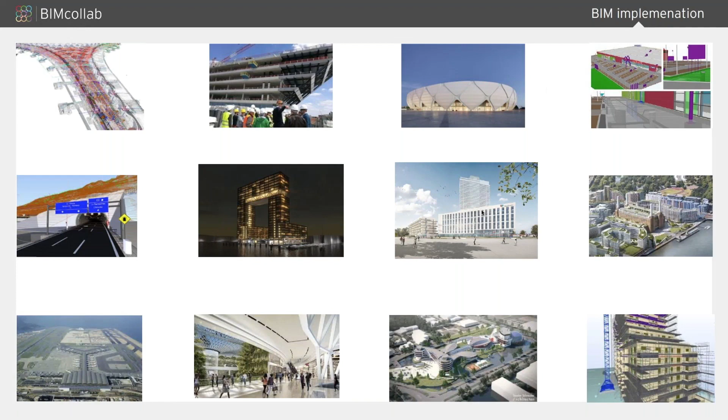If you look at the challenges that projects today have, it's also related to BIM implementation. So a lot of projects are now depending on tools that assist them in every one of those steps, design, engineering, and construction. And we see a growing use of these new tools.

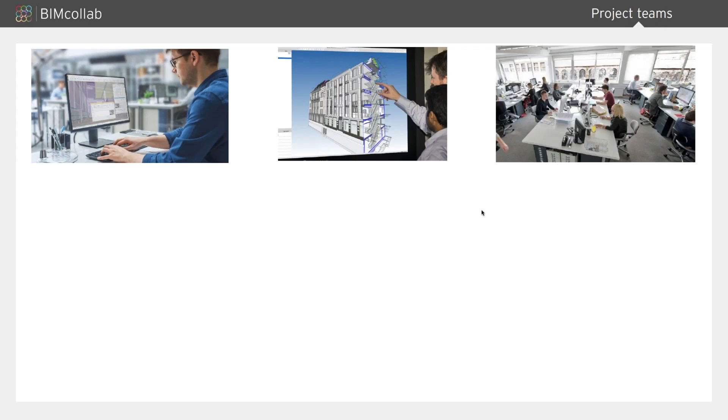As complex as projects can be, there are different teams, each with their different discipline, experience, responsibilities, and expertise, using whatever software they feel fit for their specific tasks. It might not be the same for everyone, but the teams have different points of view. They can even be using VR to get a good understanding of projects and problems. They might look at dashboards or quantities for the project to be able to get it across the finish line.

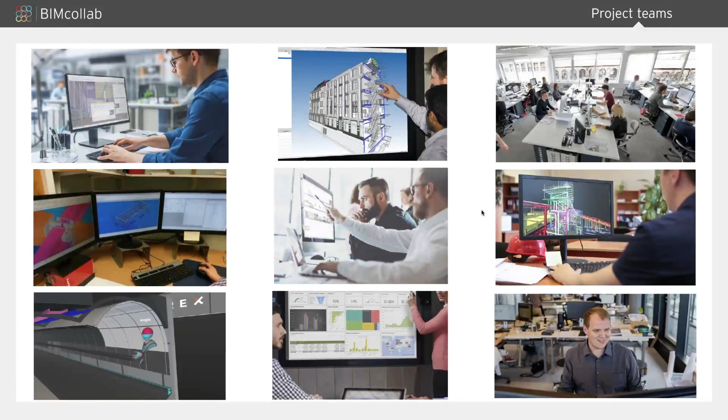If you look at how communication is documented, we feel that the efficiency of teams is highly dependent on a streamlined workflow. If you look at the traditional methods, review meetings can be done, or Excel could be used to document specific issues from those meetings, getting their comments back.

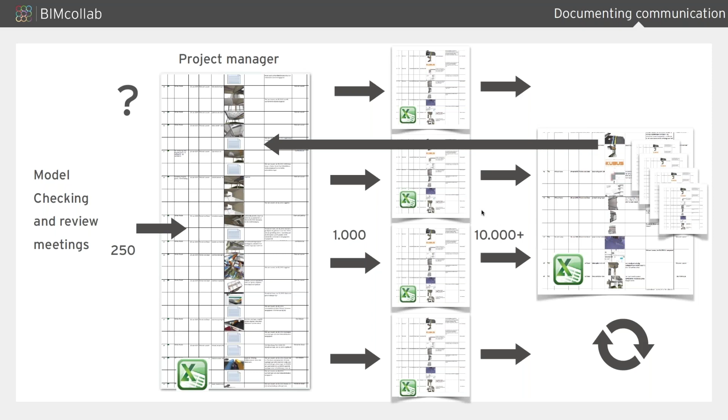And as you can see on the screen, this might evolve very quickly. So communication about status, responsibility, some approval of solutions, and this usually is up to the project team to put into one coherent document. And it's not a one-time thing, it's recurring during the life cycle of the project. And of course, there's always a sort of inherent risk if everything is put together correctly.

If you look further, we see that there are different tools in use. If you look at the BIM modeling tools, they create the models, work in progress. They can be combined with other tools like BIM checking tools. And it will also be wise to have a sort of structured communication and coordination platform attached to that. So how well they interact with each other is also part of the success of projects.

So how does BIMcollab help here? First of all, we have our cloud repository where issues and communication can be channeled through. So it's accessible for all team members on projects to log in from a web browser and view all the current topics. We have a connection for integration with different types of tools in this process.

So you can interact with the issues directly in applications. And we also have a companion desktop validation tool, BIMcollab Zoom, which can check models and also report results back to the BIMcollab cloud. And on top of that, we have common data environment integrations so that your models that are stored on those platforms can also be viewed online on the BIMcollab platform for context and also creating and responding to issues.

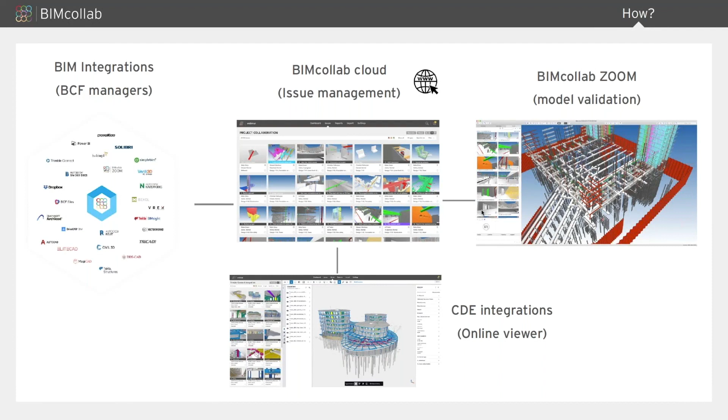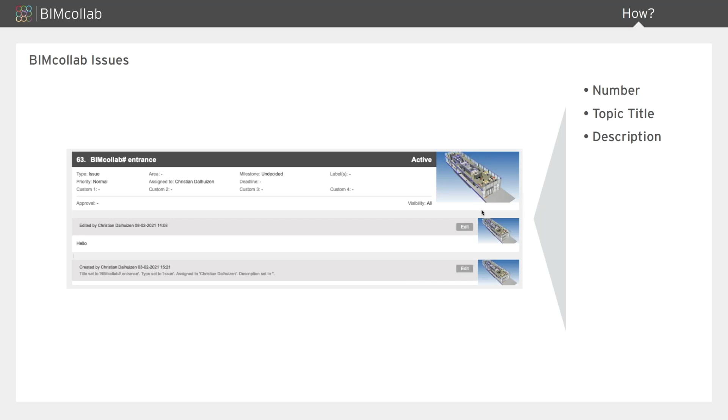So what is an issue for BIMcollab? If you look at this picture, an issue can have a number, it can have a topic title, it can have descriptions, and also very importantly, it can be assigned to a team member for responsibility at that given time in the process. On top of that, we have BIM viewpoints, which actually locate issues and even show the components that are linked to those conflicts or issues.

On top of that, we have other attributes like priorities, milestones, types, labels, comments, and even areas and custom fields if you need those in your processes. So what does this empower? Issues can be created in different types of software.

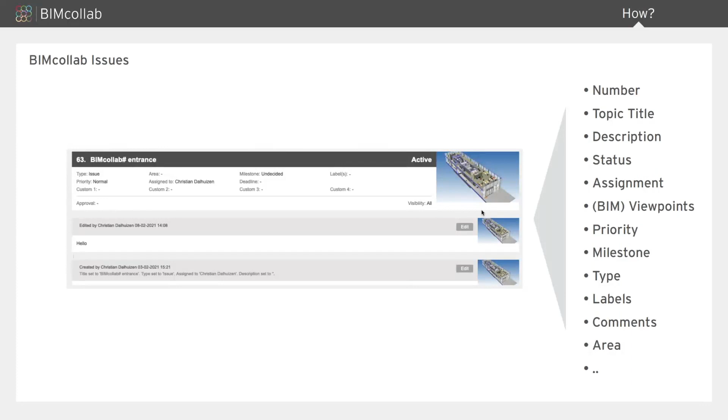So maybe for checking, you can use any of the tools that we connect with, and they all will have the same viewpoint of that specific topic. If we move further, you can also transfer those issues through our cloud system to any of the connected modeling tools, and they all look and see the same exact viewpoint. This creates, of course, better understanding and context for anything that has been communicated.

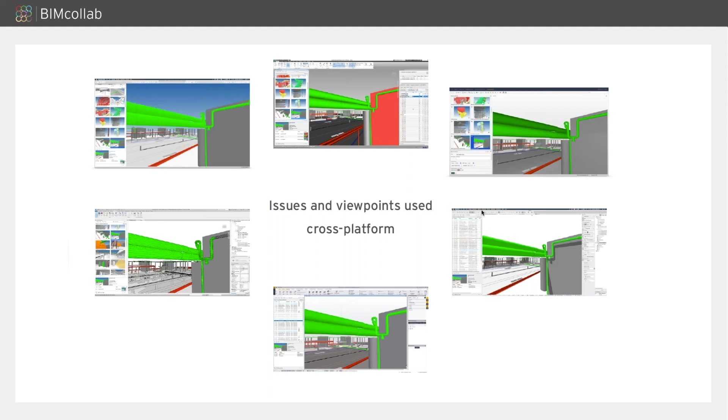I also want to discuss the availability of BIMcollab for many different scenarios. As I mentioned earlier, we have a lot of plugins or integrations with different tools within projects. So the most commonly used are already on our platform with a direct link. And we already have more than 25 connections at this time and continuously increasing this number. All of these plugins can directly be downloaded for free from our website for your specific application and version.

So I talked about different scenarios. This integration allows us to apply to many different scenarios, like maybe a Navisworks Revit setup, or a Revit to Revit communication, or even further, Solibri Revit, Solibri ArchiCAD, ArchiCAD Revit. In this example, you see that there's a lot of interaction possible with BIMcollab, and it even opens the door to incorporate several different applications that you might not even be using at this point.

So the chances are high that any of these scenarios will apply to projects that you are running yourself. If you are not yet integrated, it's also very good to know that we build our system on open standards from the Building Smart Alliance. This is the BIM collaboration format as a basis. So if your software supports this open standard, you can also export and import directly from our cloud platform and interact that way, be it in a somewhat stepped approach. But of course, you can still contribute very nicely.

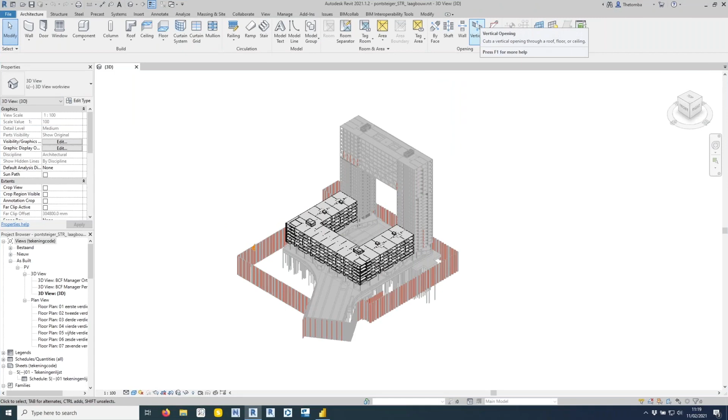After that, you can simply add and receive the issues, edit them and create issues, and also communicate with the rest of the team. So for this, I will quickly jump to my Revit modeling application, where I have already installed the BCF plugin, which you will find in the menu.

From here, I can activate the manager, giving you this dialog with the connect option available. I will log in with the credentials of the structural engineer and connect to the site. If I have more projects, this will be in this drop-down list, but the project that I will be working on is now selected. From here, I can see that I don't have any issues yet.

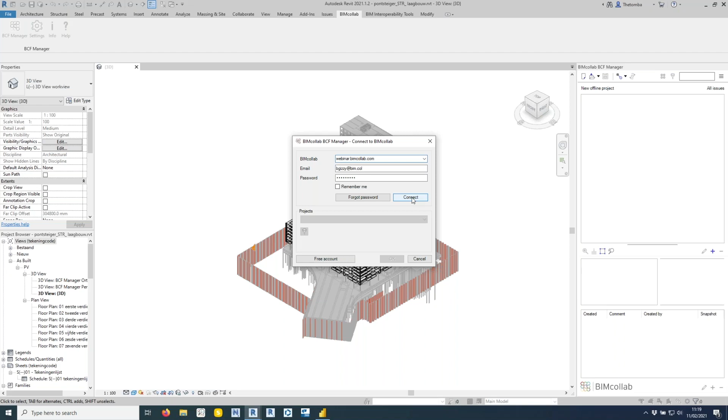I haven't shared any of the issues so far, but if I want to raise an issue, I can simply use this plugin and communicate, for instance, about this balcony here. So let's just click on the plus sign to create an issue for this. I can also save the selection within the viewpoint next to the camera, of course, and give it a title.

And maybe I want to report this as a sort of inquiry to the team's or the project's lead architect. I can also define some areas that I set as a project leader. So in this case, it will be design phase and structural. And I will just also create a comment like so. If I'm satisfied with my report, I can click on save.

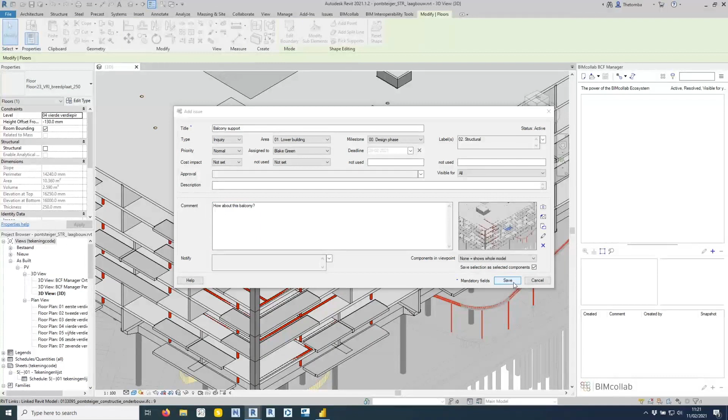And this is now documented in the BCF manager. If I'm satisfied, I can share this with the rest of the team. Let's continue. The next step would be to coordinate and do some quality assurance on the model using a different tool. For this, I will be taking the role of a BIM coordinator.

I want to have an overview of all models created, not a separate structural one, but a combination or a federation of BIM models. So I'll be setting up a combined model. I will also define some requirements checks.

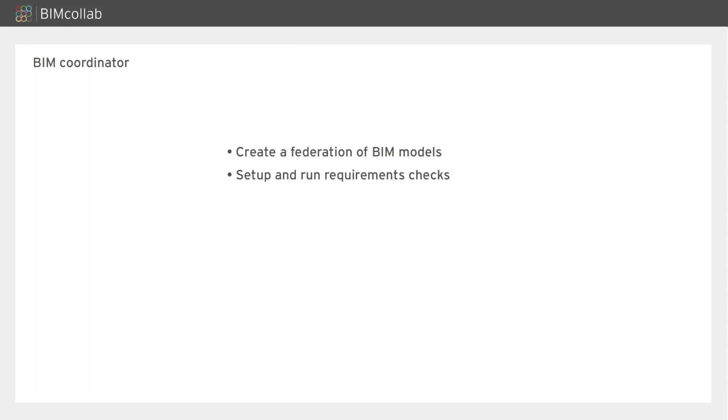So BIM can have some requirements, maybe some values that you want to add, like fire rating or load bearing, or some classification codes that you will need in the process. You can also set some requirements checks up for this to see if they are missing. And of course, we can do some geometry checks like clash detection and set up some rule sets from there.

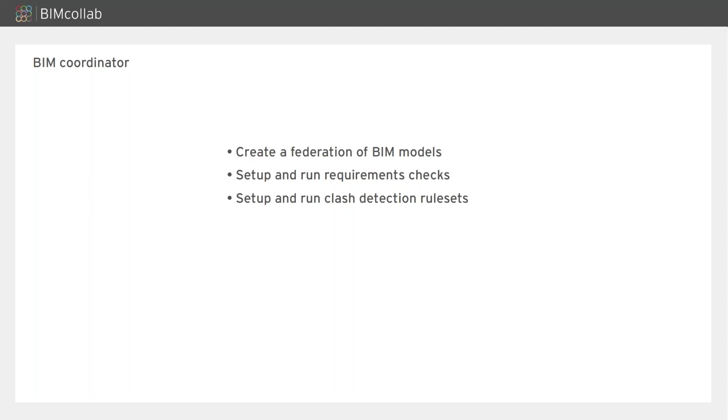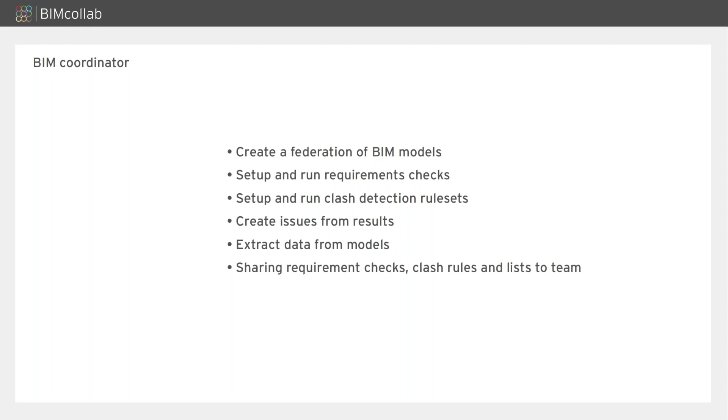If I run these rules, issues will be created from the results. And I can also already start to extract some of the data involved in the project so that people can already have a sort of influence on where the project is going and if it's feasible or not. And of course, I will be sharing this on the collaborative platform that BIMcollab is. And let's try this in a separate demo.

I'm going to switch to our application BIMcollab Zoom. Of course, like with the different scenarios, if you have other tools already available, this can also be used in that process. But in this case, I will just first start to connect to my project. I can add separate models to combine into my federation and do my checks.

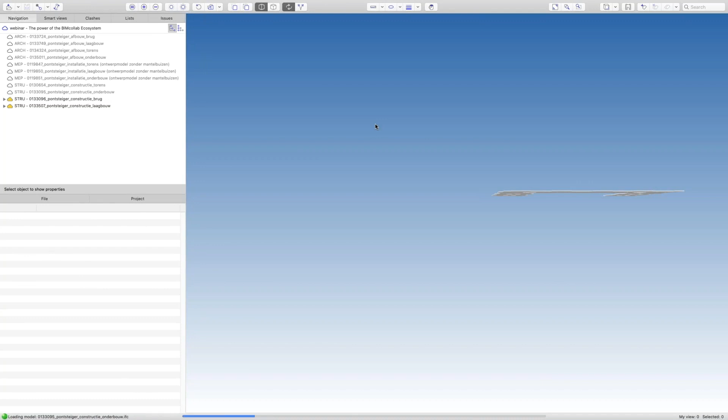With BIMcollab, you can also have a project folder where you can actually load these models automatically. So in this case, connecting to the project gives me my federation directly, and I can decide to load from a structured and synced folder directly. So of course, I have some tools at my disposal.

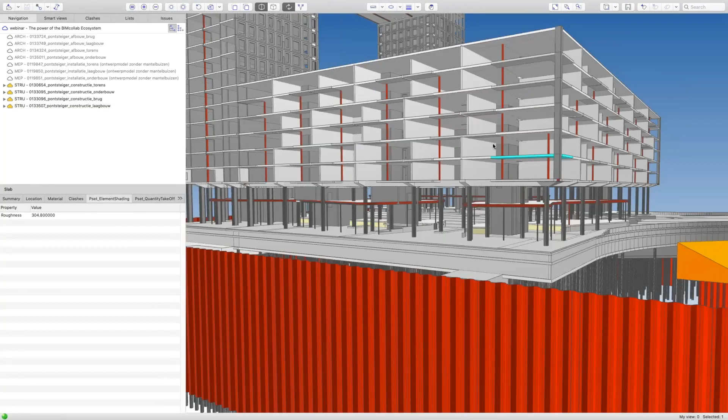I can zoom in, I can select elements, I can use the information that's inside of these models that were shared. I can look at some values that I feel are interesting. And of course, I can use all of the viewing tools like creating section planes to have a good understanding of conflicts within this particular structure.

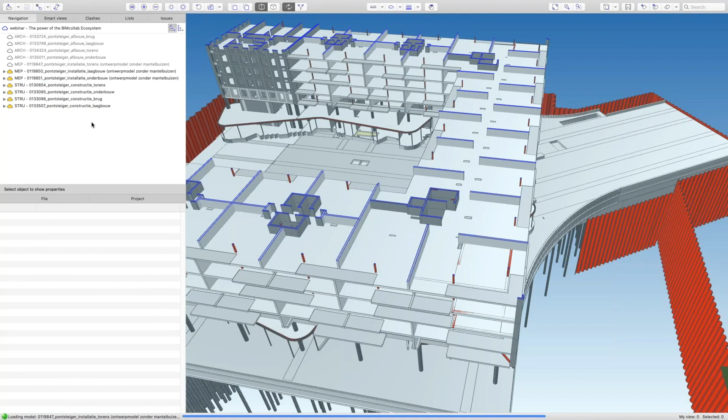If I want to add more models, let's say from the discipline MEP, I can simply add them to this federation. And I can also use those models together to see if there are any conflicts between these two disciplines. So let's just refresh and have a look. So here you can see all of the elements that were now combined with the structural model. I can use the other visualization tools like section and section boxes or color coding.

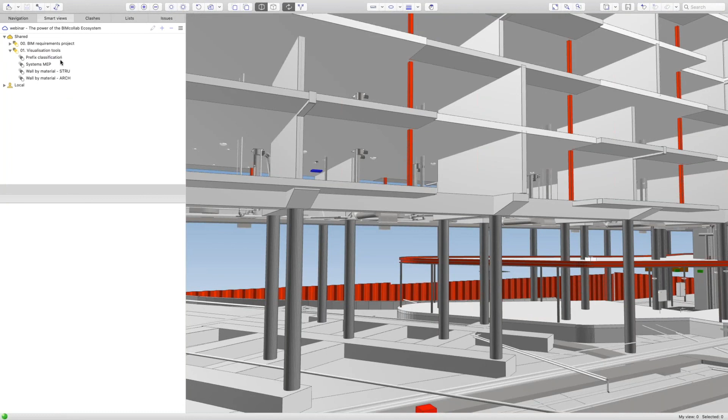But I also have some requirements checks that I already prepared. So first, let me show you some of these smart views, as we call them. They can be used to very quickly identify specific elements, isolate them in the view, and even auto-color them. I can do that also for multiple models like so.

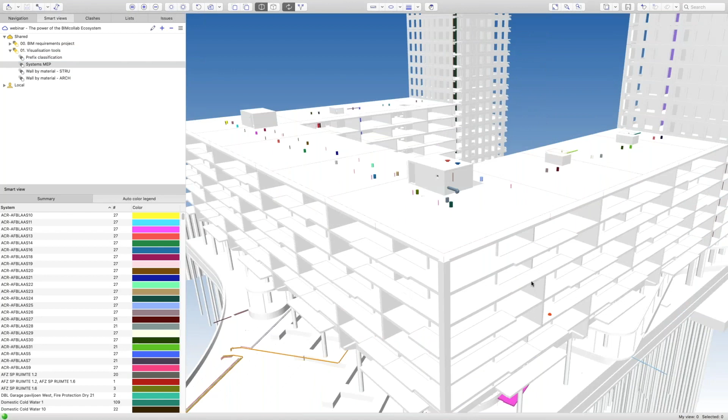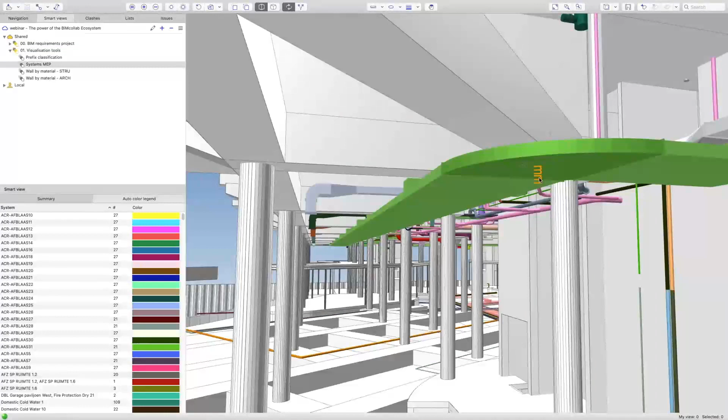So this time I have color-coded all of the MEP elements by their system and have a contrasting color for the structural part. So this would also allow me to already identify some of the issues. Maybe the clearance between these two elements is not enough. I can document that in the view, or I can simply create an issue directly from this viewpoint.

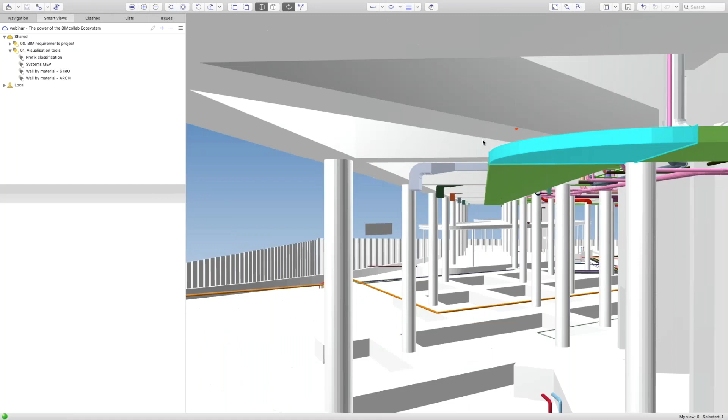I can already directly assign this. So let's assign this to the responsible person, assign some labels to this. So this is a ventilation element. I can have a description, of course, and I can also save this directly from this application as a sort of manual issue. Zoom was already connected directly to the BIMcollab repository.

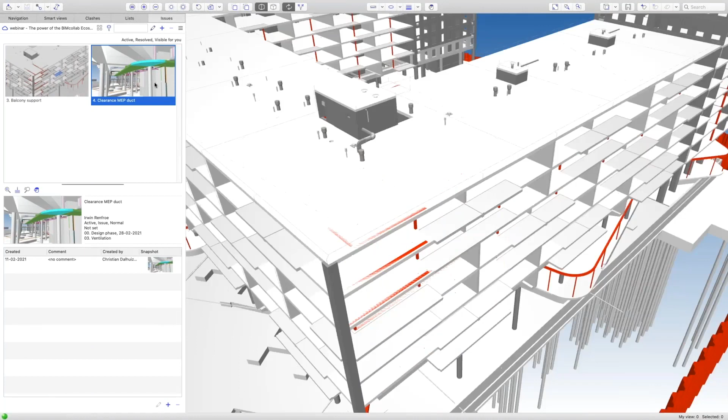So synchronizing this will also get the issues that were previously already created by the structural engineer from Revit. I have now added my own manual issue, and I can also run any of the requirements checks that I talked about earlier, like identifying elements without properties like fire rating or classifications. So let's create some more issues by running a clash test.

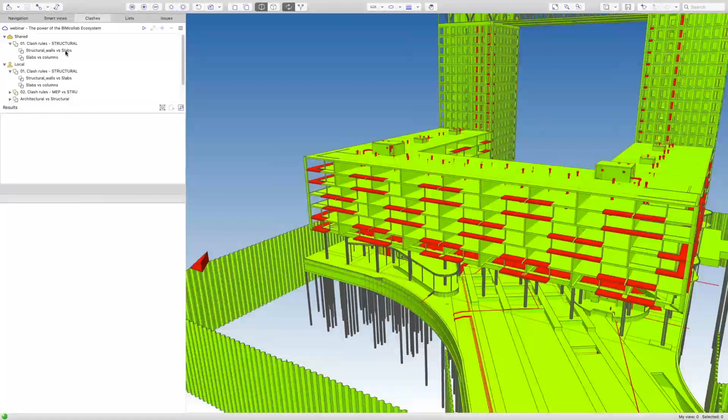I have defined several rules here. I can create them locally on my own computer as a BIM coordinator. But if I want to share that to the team, I can also drag them to the project and run them directly from here, but in the process also allow other team members to check their own models. I've made some checks. I can look at all the results now individually.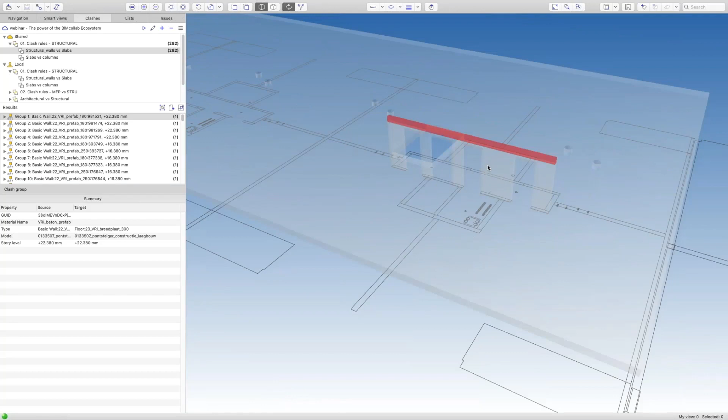So here is a wall and a slab that are clashing. I do have some viewpoints that I can use to identify if this is really a clash that I want to report. So the intersection volume is now shown. And if I run through these issues, I see that there are more related to this slab. So by selecting specific grouping parameters, I can combine multiple clash results into one big issue. So I don't want to do them one by one.

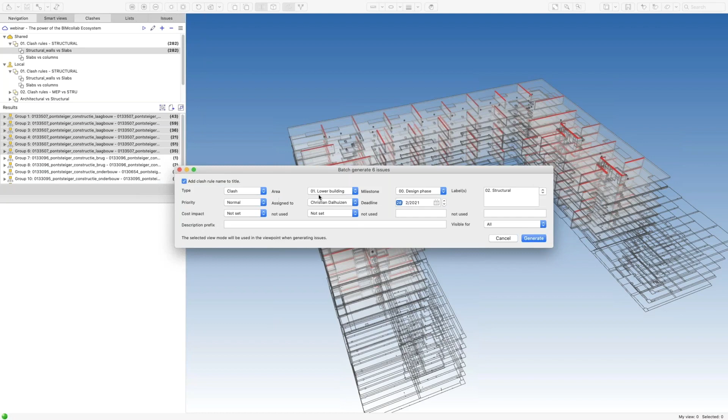So for this part of the structure, I will create in bulk some of these clashes or issues and assign them to the correct modeler, in this case, the structural engineer. So the results are now also created on the issue panel. So I can have a look at this specific issue and how it's going to be visualized in other types of software. And if I'm satisfied, I can sync that and communicate that to the rest of the team.

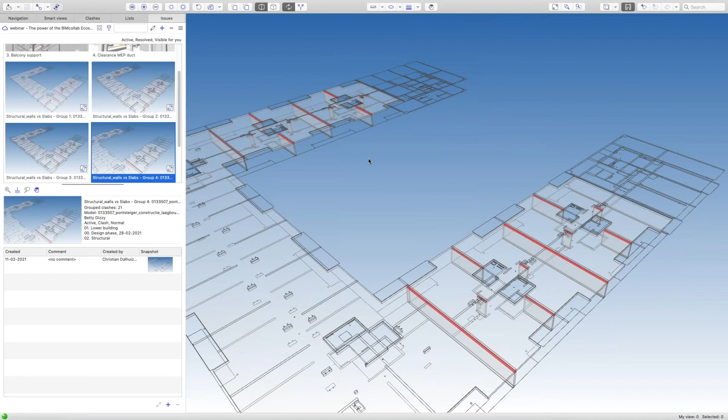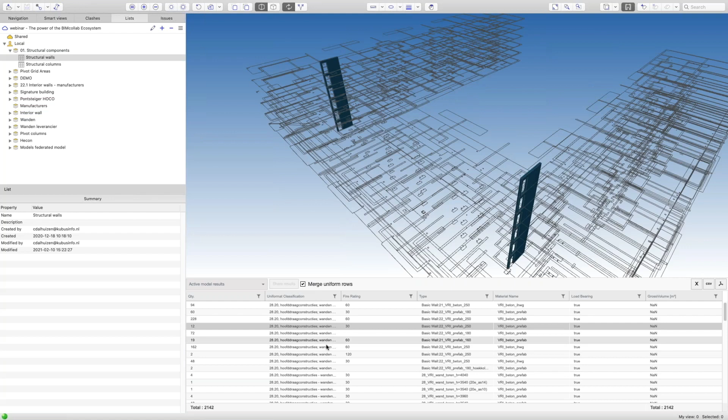To finish up, I will also use our listing feature to share some of the key values. So I can set up some lists in this application. So you can see that there's a structured list of typical elements from the structural engineer. I can also drag these lists to the shared folder for other users to make use of this setup. So I can define the lists for other people to use. And I can also share the results directly from Zoom to the rest of the team, making it a sort of collaborative effort.

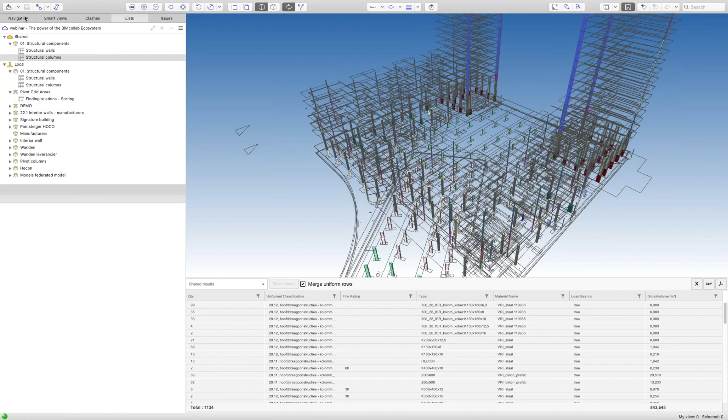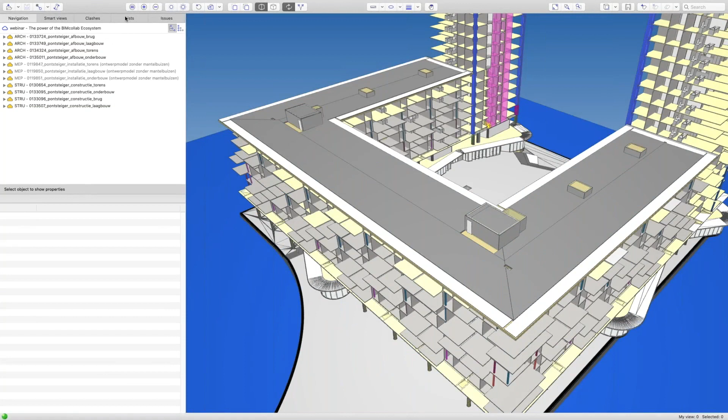So let's also go back to our models and add some of the architectural models to this review. I'm going to use the architectural models because there are some spaces and rooms attached to that model. And I want to use that to create a list of some of the key values for floor area and volumes. I have a very nice tool for this. We call this the pivot grid. And it's actually a tool where you can locate and find relationships. So let's just run this list.

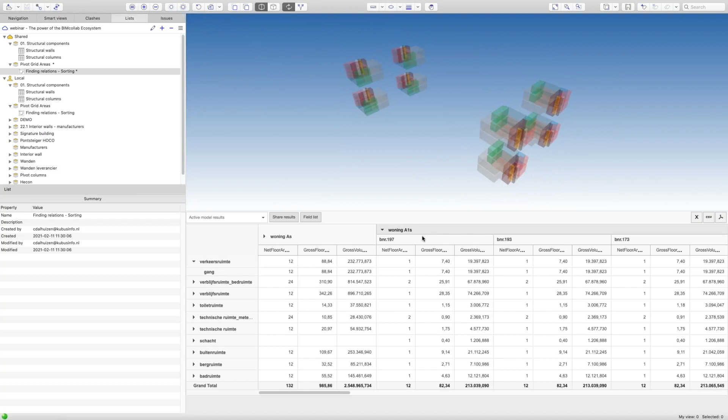As you can see, I have now a list that groups together all different apartment types and specifies their build number below that. And I can have a drill down of any of these values now. So I can look at a space category, a specific space name, apartment type, or an apartment number, and see where it's located directly from this application. If I want to create issues for this, then I can also share them with the use of this list. And it's also very intuitive to find this and sort and find these relationships.

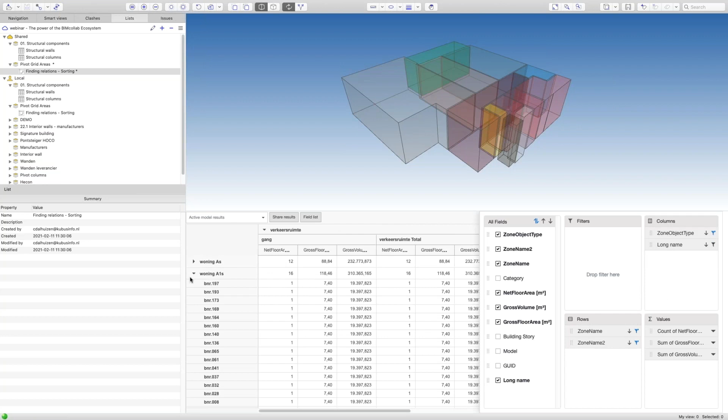So let's just rearrange this schedule by dragging these values from the columns to the rows. And now I have an overview per apartment type and which build numbers are related to this. Again, if you're satisfied, you can view this information directly from Zoom, but I can also share that with the rest of the team.

Okay, going back to the next step, team collaboration. I'm not the only one working, so I have generated some of the results or the issues. I have made some lists for the team to have a look at, but there are, of course, some experts who have a very detailed opinion about any of those elements, and I want to involve them as well.

So, looking at other stakeholders, they can, of course, use our web application, logging in to the platform and then viewing the issues that are assigned to them. They can also use the desktop Zoom application if they have that installed and have a look at the models themselves, even create issues when they need to. And we can also add an online model viewer for easy access to model information and also to understand our issues on our platform better.

Besides that, we can also have information flowing from our platform directly to other platforms. So Power BI is an integration that we offer for free. The link to this can be downloaded from our website. If you also want to have a look at lists, the web application would be your go-to choice. So a small presentation for this.

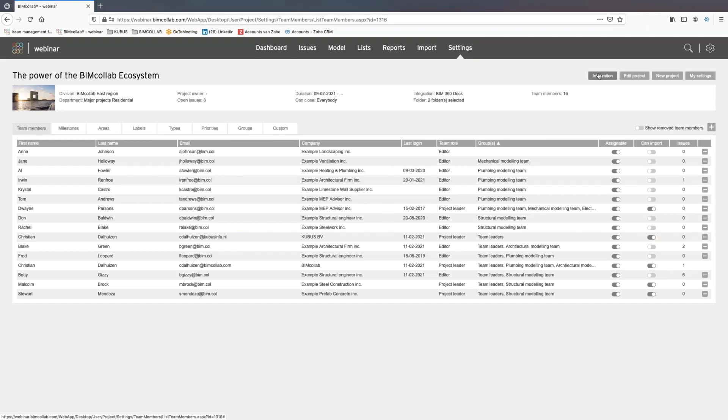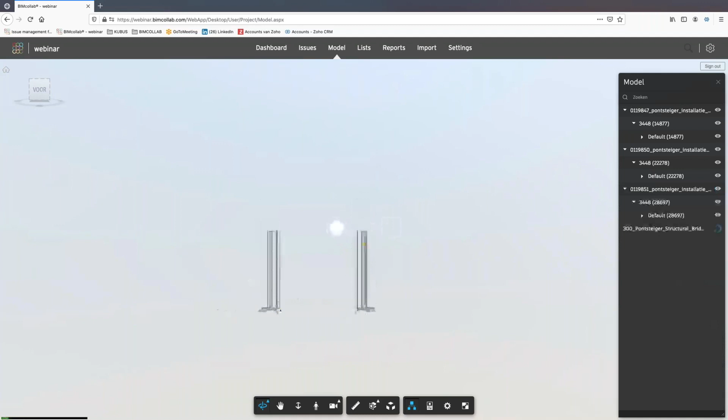I also mentioned the online viewer integration. If I look at the settings for this project, I will be using BIM 360 Docs, but we offer more connections. So if your company or your project is run on Trimble Connect, then the same model viewing abilities apply. And stakeholders can access it directly from the browser environment. You don't need to re-upload any of the model files. They can be directly streamed from the BIM 360 Docs environment for use on BIMcollab combined with the issues.

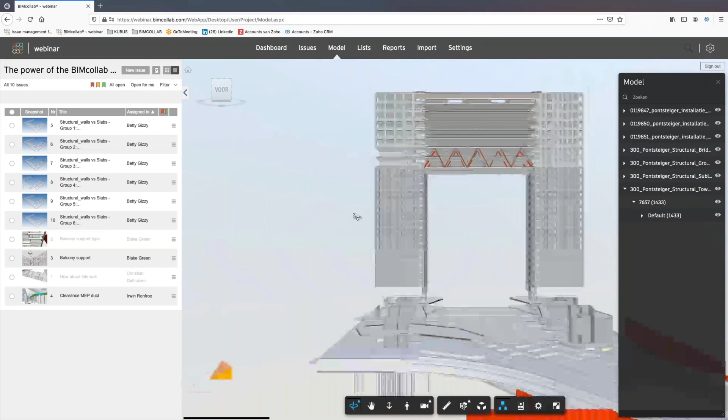So while the model is loading, you can see that all of these models that come from BIM 360 are visible. The properties can be shown. You can navigate freely inside of this environment without the need of downloading these heavy files or installing any type of application. So if you want to review or have a look at specific elements, you can also hide and show different types of elements.

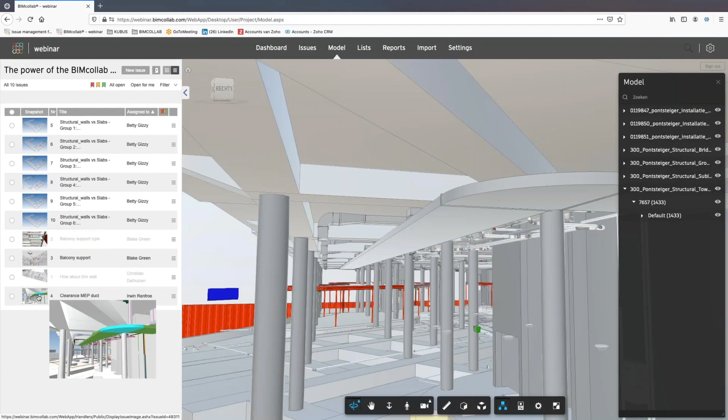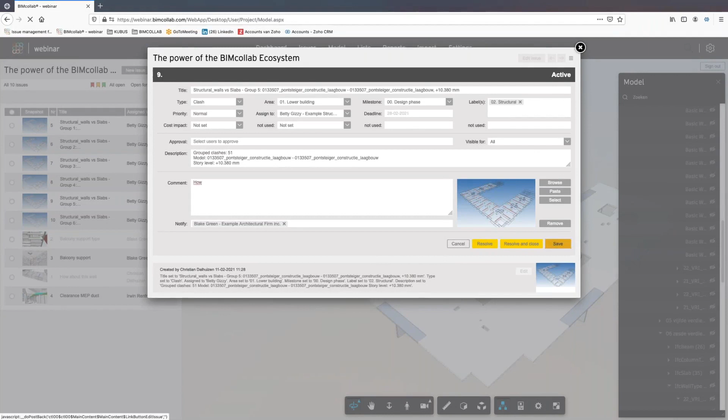And if you want to recreate any of the communicated issues, you can simply click on the viewpoint and have an understanding of what has been communicated here. If you for some reason want to add to this topic, you can simply use any of the issues here and edit the issue, maybe add a comment to a stakeholder, put in a notification, maybe to the lead architect, and save that out, and it's immediately available for everyone in the project.

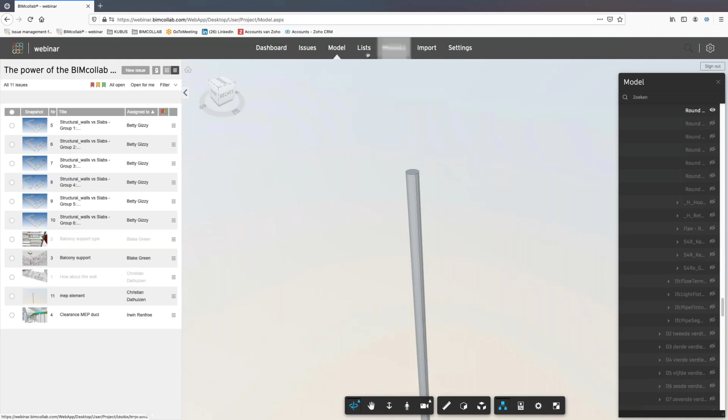We even allow you to create your own issues. So if you use this application, you can also immediately create an issue directly from this environment. So creating a new issue will also bring that to the rest of the team. So I have an overview. I have the dashboard to see all the latest changes. I have the model to review, and the project coordinator or the BIM coordinator has also shared some of the key values. So the list is also available directly from this page.

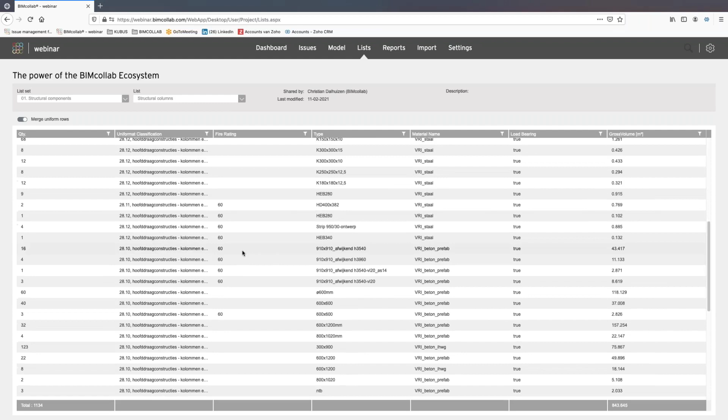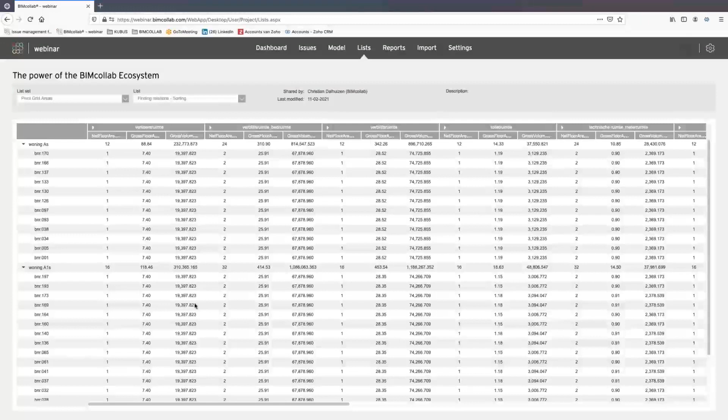So I can see the overview of the list of columns from the structural engineer, the structural walls, and I can have a look at the areas that I created earlier. If I want to see which build numbers correspond to which type of building or apartment type, these numbers are also visible directly from here.

We have now some issues. We have lists. We have stakeholders involved through the web app, Zoom, or online viewer, or the lists. We have the modelers connected. And the project leader can now also start coordinating these issues in a structured and streamlined way, tracking them in the process, creating reports for the team, analyzing some of the results. So let's just review this.

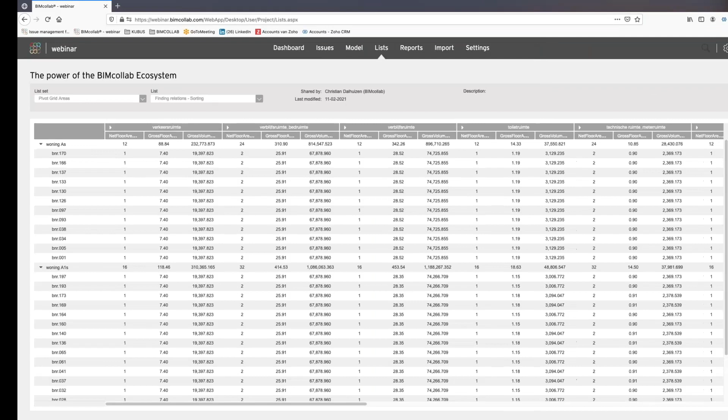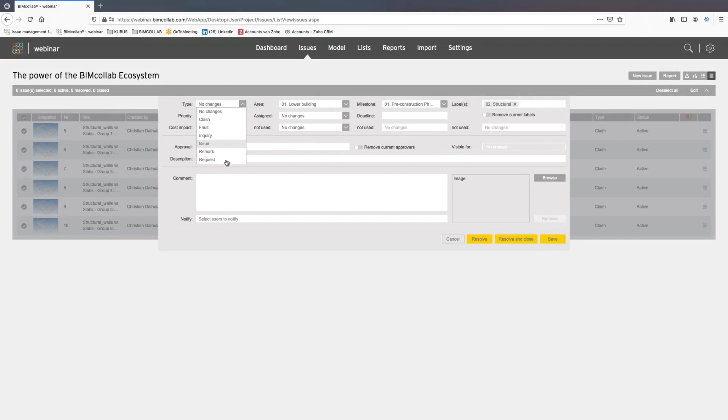So on the issue page, as a BIM manager, I can filter very quickly. So I can say, well, let's just show all of the issues assigned to the structural engineering company, filter those out. I can also multi-select those, edit them, and give them more detailed instructions. So I can say, well, this is about the pre-construction phase. I can set the area. I can define the types, maybe even add some priority here.

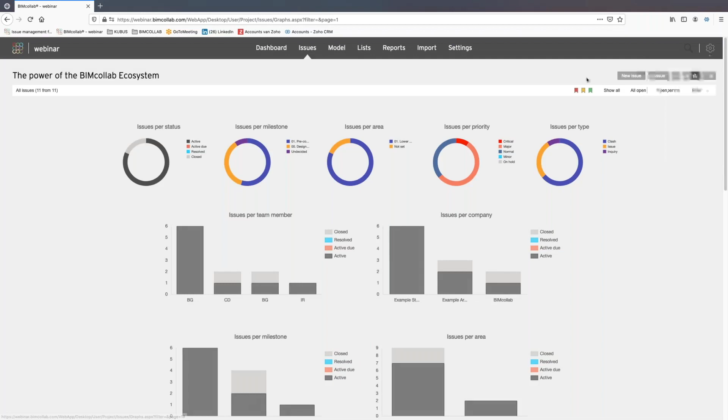If I go back to the issue page, I can also have a look at the specific graphs, either for that specific company. I can have an overview of all team members in the project, who has the most issues, what is the process there, are there issues already resolved or closed. I can also track the efficiency or progress over time once the project is up and running. If I want to create reports, I can export this to a PDF or an Excel spreadsheet if that's needed.

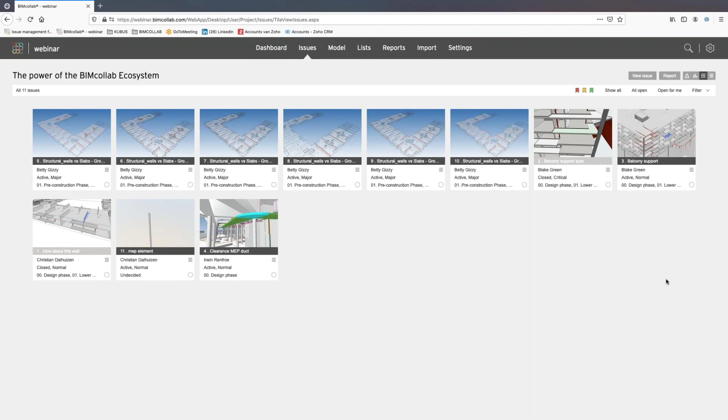Users can also, of course, be invited on this project in the cloud to have an overview as well. All issues that you have seen here are actually part of our database. I also want to show you that an external integration can be very helpful. So let me just switch to this application. For those of you who are not familiar with this application, this is Microsoft's Power BI.

So we feel this is also very helpful because, as I said in the beginning, people are working on the project on multiple levels. Some are very heavy in the technical part using the BIM applications. Some just look at the quantities, and maybe a manager will look at these numbers in a more explanatory visual style. The last part that I want to share with you is about scalability. I think I already showed you that BIMcollab can be applied to a very broad range of scenarios.

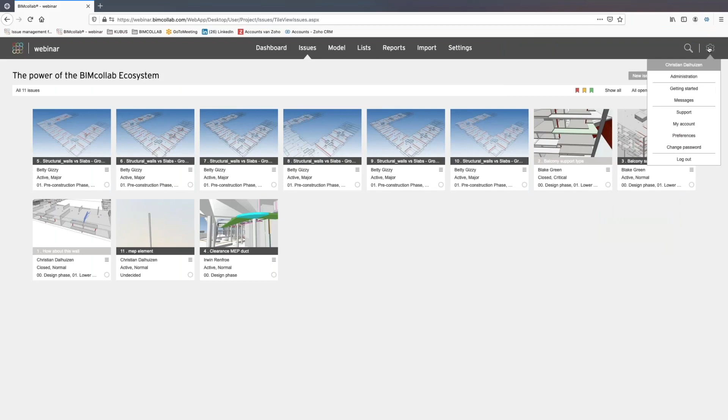So just to give you a quick view on the administration part, as an administrator, I have the only access to this part of the account. As you can see, I have all my contact and billing info. I can also upgrade or downgrade my project if need be. I also have control over all my account settings.

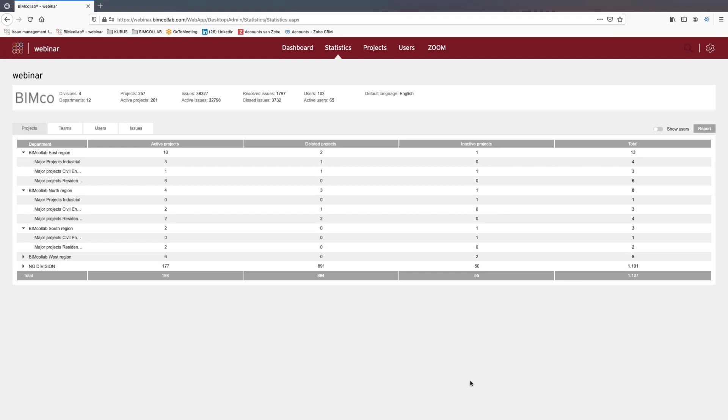I have user management control, so I can designate who can log on and where. If I click on any one of these users, I can also see which projects they are working on, when they last logged in, etc. And also for our enterprise users, we have these very elaborate statistics where you can see by department or division all of the usage, the projects that you run on BIMcollab, making it a very scalable solution from one project to 1,000 projects in parallel. And of course, everything is highly secure with encrypted logins, etc.

So as I mentioned in the beginning, we have a software as a service. This also allows you to step in for free, but it's not upgradable. If you want to start in a streamlined fashion, we advise to use one of our subscriptions because you can upgrade and scale up very quickly if the need arises. So we have different types of workflows. You can add more users to collaborate with, but you can also add more functionality if your usage of BIMcollab grows.

So all in all, a quick summary: streamlined approach based on open BIM standards. Documenting issues becomes a part of the process. So there's no hours spent on creating Excel documents anymore. It's just a matter of exporting them or not creating them at all because the workflow already explains everything. You will find that it engages teams better because everyone has an overview and can interact and has a voice. We also want to include as many stakeholders as possible because every experience and knowledge counts. This will also lead to a faster time to resolution for some of the challenges.

And you have a structured approach with our validation tools about the model quality, up-to-date projects for multiple levels, and you have better control over progress and the end results. We feel that because of our open nature, it's a very easy transition. You can just upgrade your current processes with BIMcollab and start working today. And like I mentioned earlier, it's highly scalable, moving from small usage to very intensive use very quickly and structured.